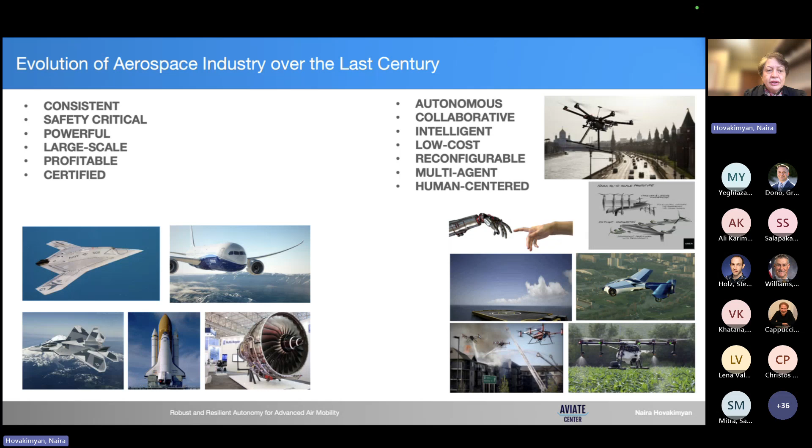I came to the United States back in 1998 to Georgia Tech to work on stability flight control systems. That's when I was first introduced to the aerospace industry. My PhD was in math, and the aerospace industry was presented through these major, powerful, certified technologies that the Georgia Tech group was working on. As I worked 28 years in this country, the industry faced change to more small-scale, collaborative, human-centered, intelligent solutions that you see on the right.

And this transformation of industry happened because the data explosion, enabled through CPUs and GPUs that became cheap and available, boosted the machine learning algorithms. We see today large language models, vision language action models that are transforming the way control systems are being designed and deployed. From the perspective of the aerospace industry, this transformation can be viewed as going from high altitude to low altitude.

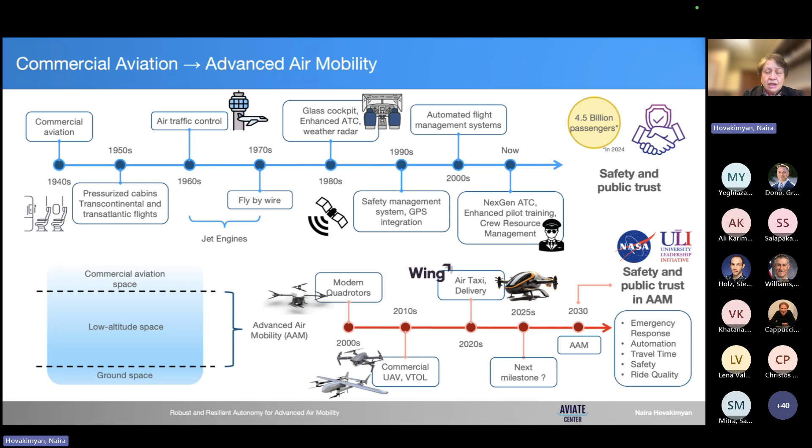By enforcing zero tolerance to accidents, over 100 years, commercial aviation has reached safety and public trust by flying 4.5 billion passengers per year. The same cannot be said for low-altitude space, which became actively deployed in this century. And the recent DCA airport collision of last January is evidence of the fact that the low-altitude space still remains largely vulnerable to different uncertainties and unpredictable circumstances.

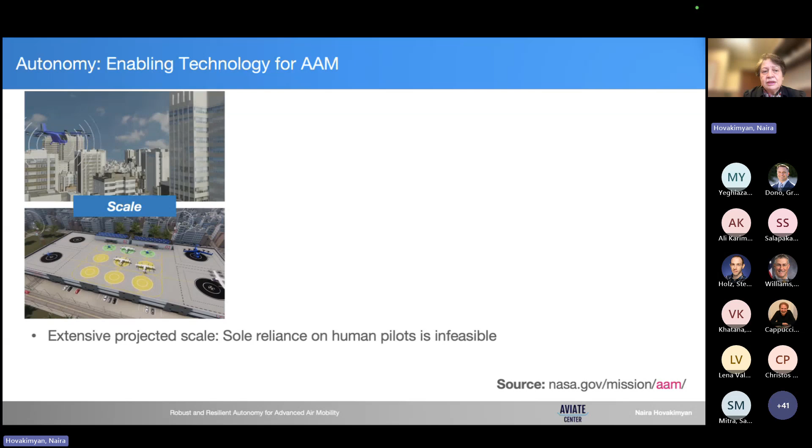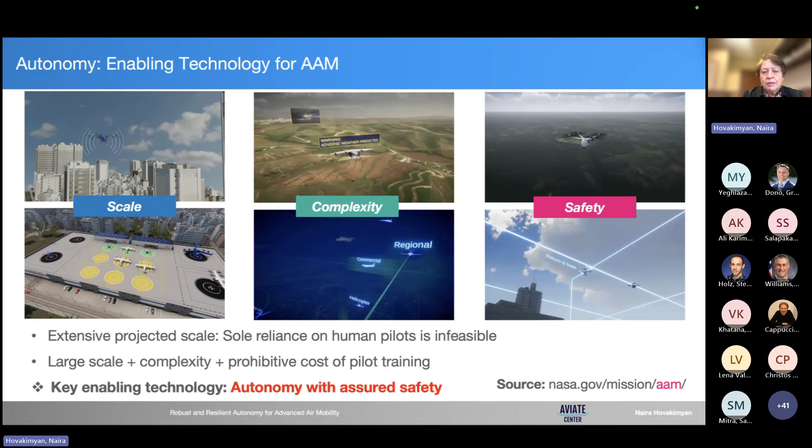This particular ULI project had as one of its objectives to design and deploy safety architectures for autonomous systems that would enable, for example, easy access for emergency response, for healthcare, where we're trying to look into travel time minimization, cargo delivery, and enabling all of this at scale and safely. So the key challenges that we see here in the low-altitude space are how to enable operations at scale, given the complexity of these operations, and to ensure that we can achieve it all with safety. That's why autonomy with assured safety may be identified as one of the thrusts within NASA ARMD.

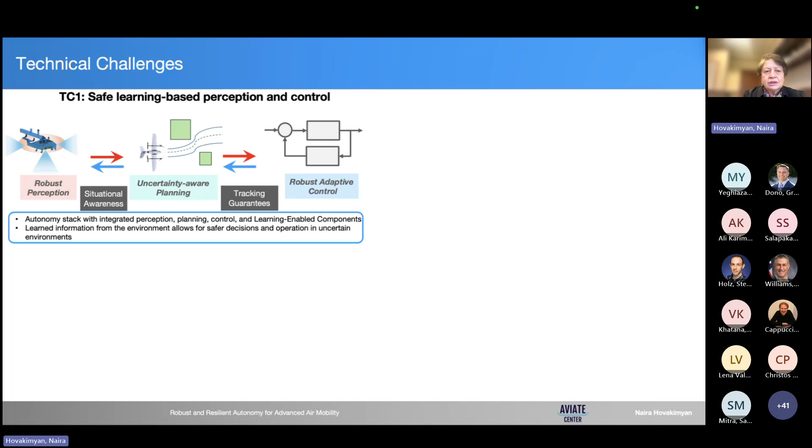The technical challenges that this particular ULI has tried to address include safe learning-based perception and control, fast data-driven and code-level verification, runtime fault diagnosis and reachability analysis, testing, evaluation, and integration towards technology transfer. We have technical challenge leads present in this 1-hour meeting, and each of them will go into the details of their developments. I will cover TC1 partially.

At the heart of this ULI project is L1 adaptive control with its 20 years of history. We started the first development in 2004-5, with the first papers appearing in 2006. During 2007-10, NASA Langley enabled us to fly it on the subscale commercial jet that you see here. We were the only controller cleared by the pilots for stall and post-stall flight regimes, enabling data collection at the departure edges of the flight envelope, updating those models.

Over the years, we saw increased interest from different industries for commercialization and technology transfer. They were deployed on the Evolution autopilots of Raymarine, hydraulic pumps of Caterpillar.

These are other industries outside aerospace. We had tests on experimental rigs of Statoil and many other developments. Starting 2015, we got the opportunity to flight test it on Learjet and Vista platforms at Edwards Air Force Base. Various challenging scenarios were considered there, such as saber dance, well known in the aerospace industry.

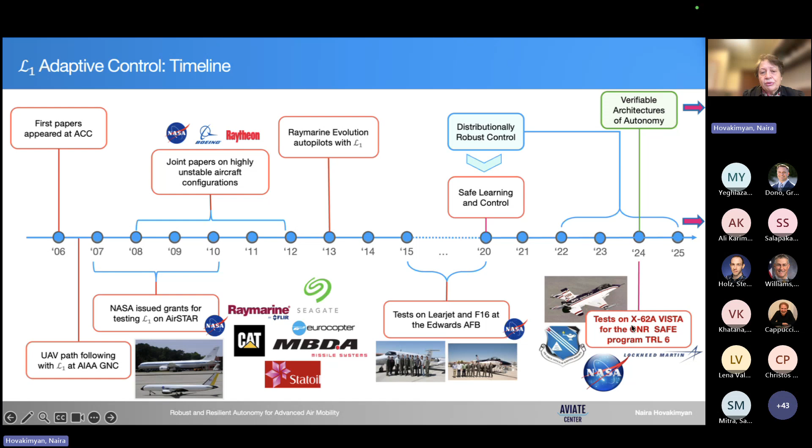And since 2020, we moved into safe learning and control, and we're looking into issues like distributionally robust control, which I will clarify through my talk. Last year, we already got Lockheed Martin putting it on the Vista platform and achieving TRL-6 in a 3G maneuver. As I go ahead, I will clarify now the particulars of the Lockheed Martin flight test. They couldn't join our talk today.

Lockheed Martin was also funded by ONR through their SAFE program, and they had the opportunity to augment the L1 adaptive controller on top of baseline nonlinear dynamic inversion. And with the failed right flap, like a heat-to-guns maneuver, you can see here the performance achieved by L1. Here is a small movie that will show both L1 on and off. They call it safe architecture on and off.

The detailed slides of their technology transition can be found on our Aviate website under last year's Autonomy Fest, which happened at the University of Nevada, Reno. Some of those movies you will see, but let me turn on this 12-second movie where you will see left and right for comparison with the safe architecture on and off. You see how L1 handles it pretty well, while without L1, the baseline nonlinear dynamic inversion was not able to keep it in the loop.

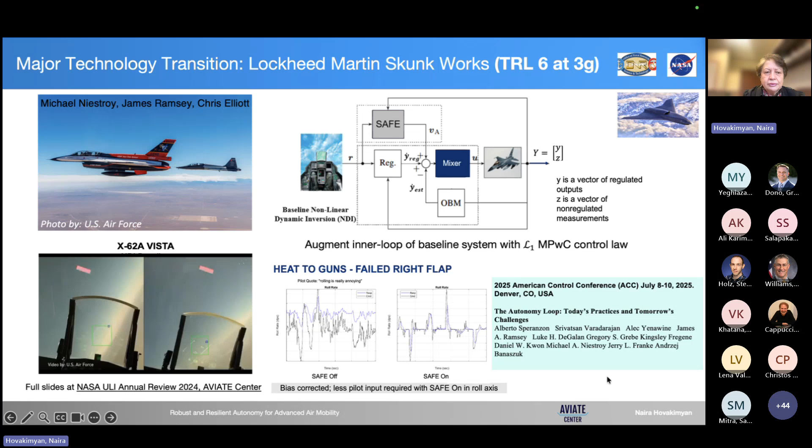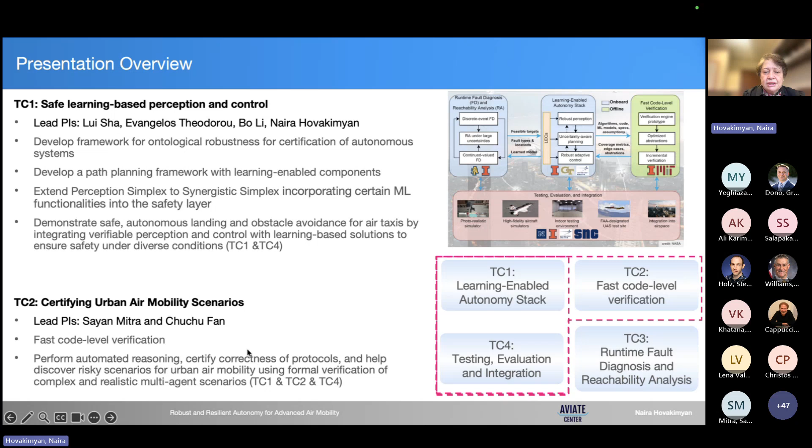I will start with TC1 and present safe learning-based perception and control. A PhD student of Lui Sha, Michael, will present the extension of perception simplex to synergistic simplex that incorporates machine learning functionalities into the safety layer. We will have Sayan Mitra covering fast code-level verification, and they will show their examples as an intersection between different TCs. We have Ali Karimoddini, who will cover TC3, the runtime fault diagnosis and reachability analysis, and they will show how they incorporate active learning and sensing for discrete faults, which will be an intersection between TC2 and TC3.

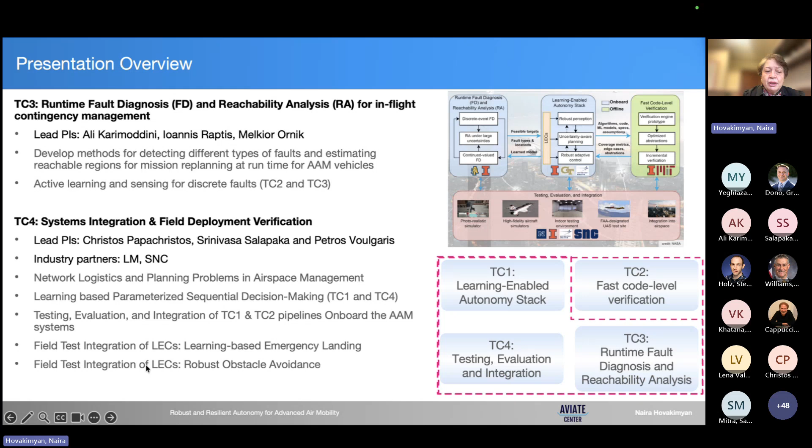TC4 is pretty extensive because we have here the flight test validation and industry technology transfers, and we'll have Vasu Salapaka covering network logistics and planning problems in airspace management, where he will present his learning-based parameterized sequential decision-making algorithms and how they scale with the help of AI-assisted tools. Christos Papachristos will show the flight test validations, videos that are very fun to watch.

Personally, I went out and reached high school and middle school girls in Urbana, and North Carolina had their outreach events. We were very well represented through the drone camp at UIUC and many other events. Now moving to the particular work done within our group.

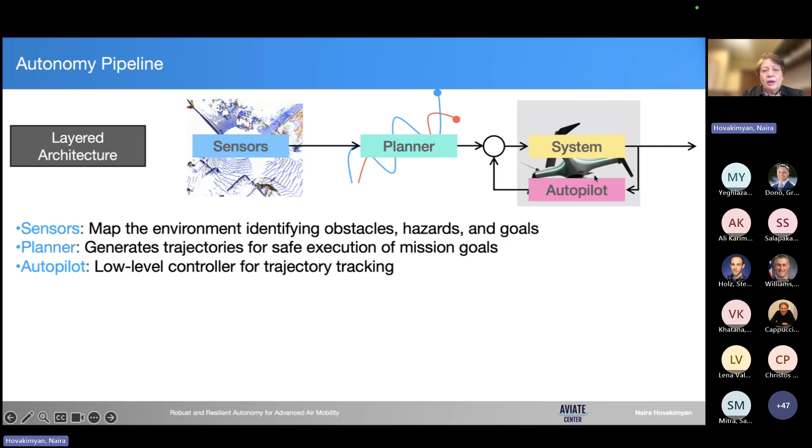I view this as one of the major challenges of autonomy because in this case, the situation changes. We have already vision-based sensors that map the environment. The planner, based on this map, updates the flight envelope instantaneously at every millisecond. And there is a low-level autopilot that has to follow the planner commands.

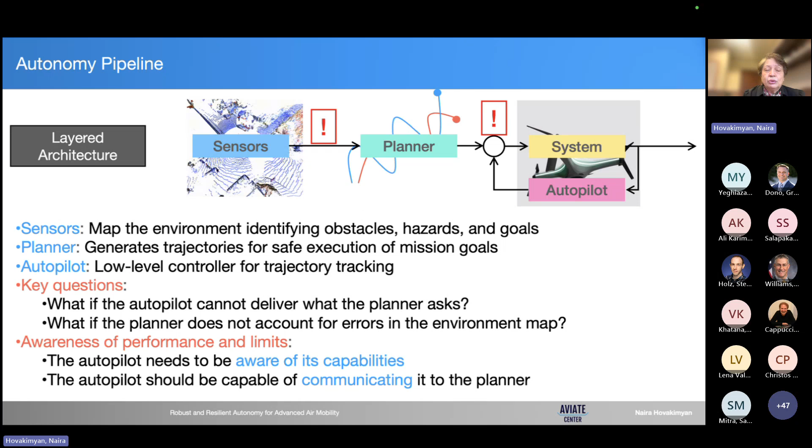So the challenge we see here is, what if the autopilot cannot deliver what the planner is asking for? What if the planner does not account for errors in the environmental map? So the autopilot needs to be aware of its capabilities and needs to communicate it to the planner so that they all are in sync. So here is the key challenge.

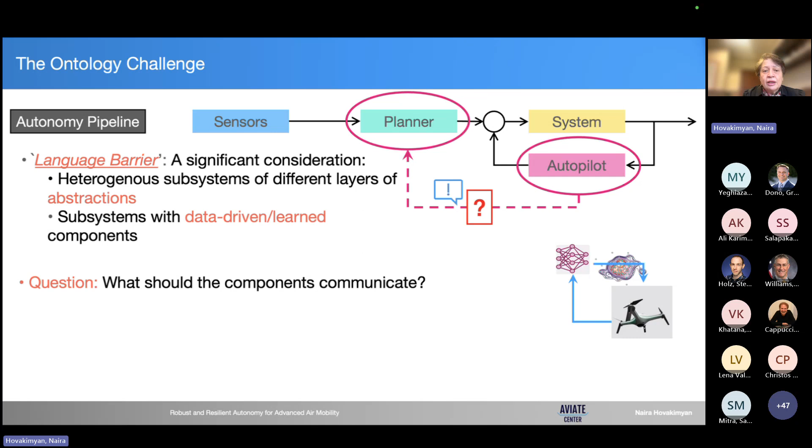The challenge is that when you have these vision-based sensors that are generating the map for the planner to produce the instantaneous path, this all happens with data-driven learned components, while our autopilot can be a PID that lives in the deterministic world with Nyquist and Bode defining its gain and phase margins.

So the challenge is what should the components communicate if they are born and developed in different worlds, stochastic and deterministic, and what should be the language of communication? These answers are critical for guaranteed robustness and assurance of learned data-driven systems.

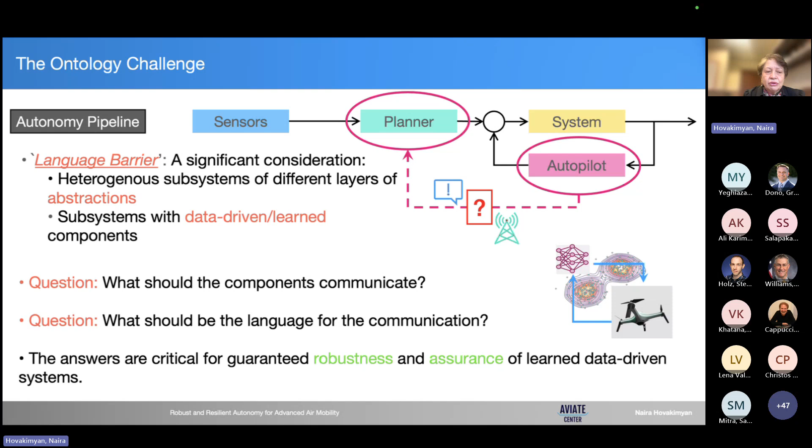So further challenges come with the fact that the guarantees coming from this stochastic world will be sensitive to distribution shifts. We need robustness to epistemic uncertainties, which are the learnable uncertainties, or as engineers would call them, known unknowns. We need robustness to aleatoric uncertainties, which are the unlearnable, the unknown unknowns. These are the disturbances and unpredictable environmental uncertainties. And we need also robustness to policy-induced uncertainties, which can be reducible.

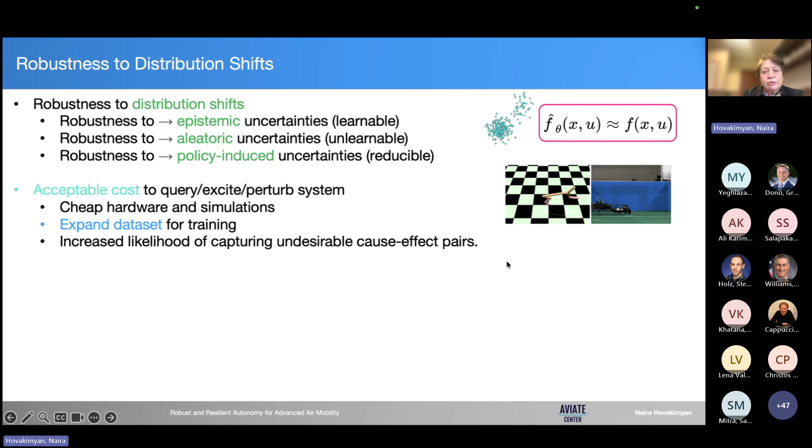It's one thing when you are dealing with cheap hardware or simulation environments where you can break, fall, get up, learn, collect the data, update the learning algorithm, update the network architecture, and iteratively improve infinitely, like many people do with reinforcement learning, to get an acceptable performance level.

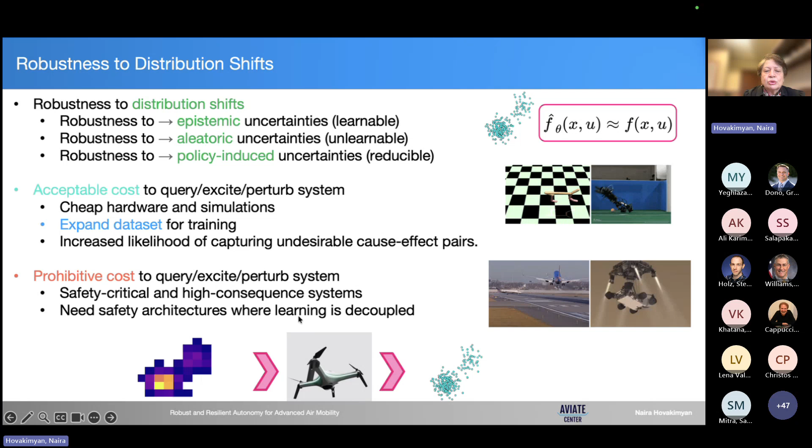It's another thing when you're dealing with safety-critical systems like an airplane or a mission landing on Mars, where the cost is absolutely prohibitive to fly, test, crash a million times, collect data, update, re-update, and fly. You just can't kill people infinite times. We need safety architectures where learning is decoupled from the performance. So the autonomy pipeline, as we said, involves the sensors, planner, and autopilot.

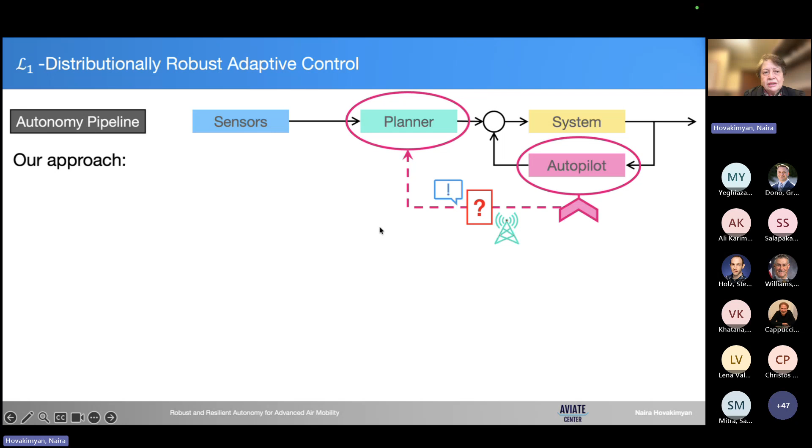The way we have addressed it is the distributionally robust L1 adaptive control. What does it do? We derived distributional robustness guarantees for the deterministic L1 adaptive controller that was flown on Learjet and on the subscale Boeing airplane at NASA and had its guaranteed gain and phase margins. These airplanes have flown with an L1 adaptive controller that had its guaranteed gain and time delay margins.

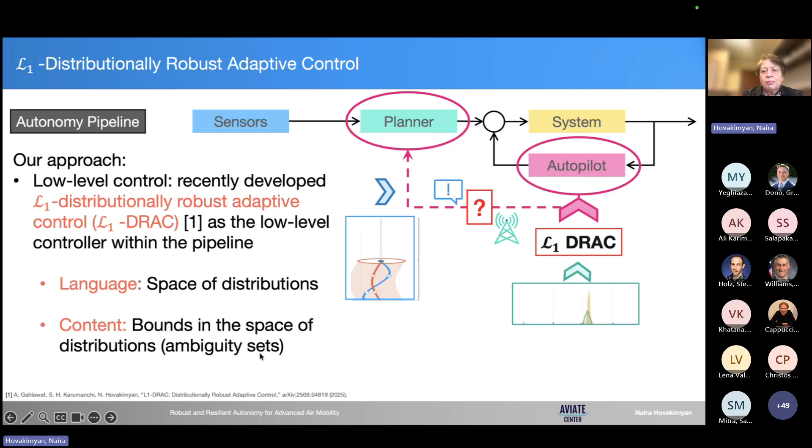Now this L1 is deployed on a system that's operating autonomously, where there are vision-based sensors producing the instantaneous updates for the planner. How will L1 work and communicate with this type of new inputs to the system? So we define distributional robustness guarantees for L1. The language is the space of distributions, and we bound the performance of the L1 adaptive controller in the space of distributions in terms of ambiguity sets. These bounds are derived in terms of Wasserstein ambiguity sets.

Let's look at what the stochastic planner is doing. The stochastic planner solves a minimization problem over the expectation over an ambiguity set. This ambiguity set is now obtained through the distributional robustness bounds of the L1 adaptive controller.

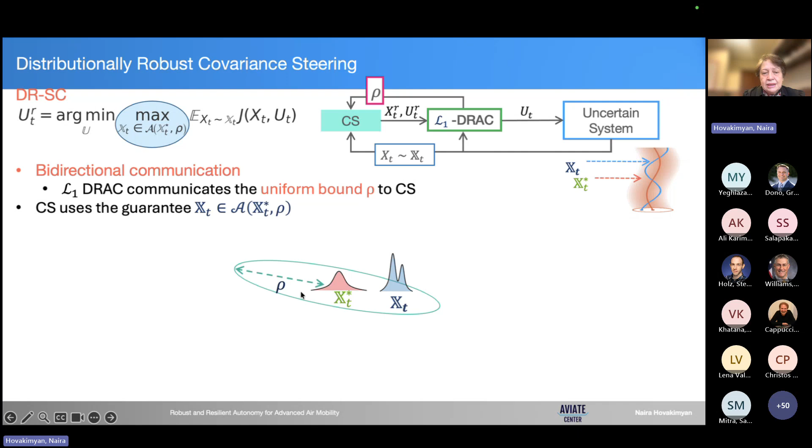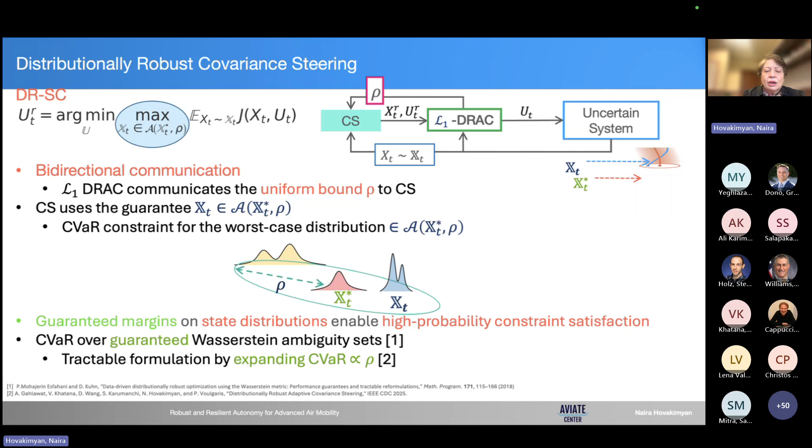As an exercise, we have done it for covariance steering, which is a stochastic planner. Covariance steering now uses the ambiguity set coming from the L1 adaptive controller with a conditional value at risk constraint for the worst-case distribution belonging to that ambiguity set. We get guaranteed margins on state distributions that enable high-probability constraint satisfaction, guaranteed over Wasserstein ambiguity sets. There is a tractable formulation by expanding conditional value at risk proportional to the radius of this ambiguity set.

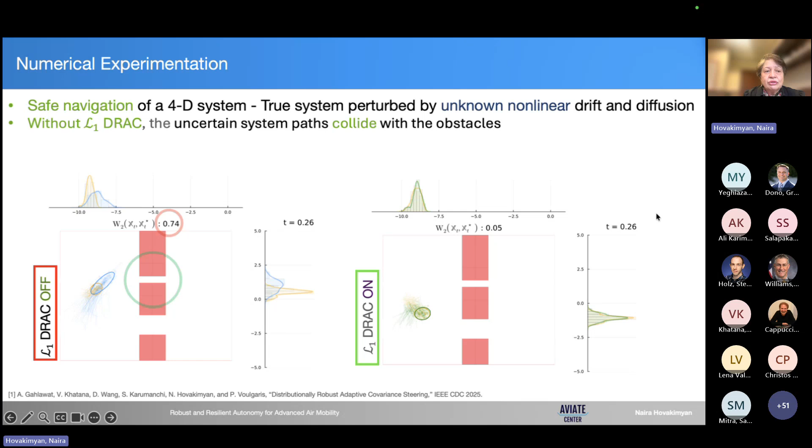Here is a safe navigation of a four-dimensional system, a true system perturbed by unknown nonlinear drift and diffusion. Without L1 DRAC, you see the performance on the left where it starts crashing into the obstacles. And with L1, we can use the safety margin propagated by L1 to find the safe navigation path.

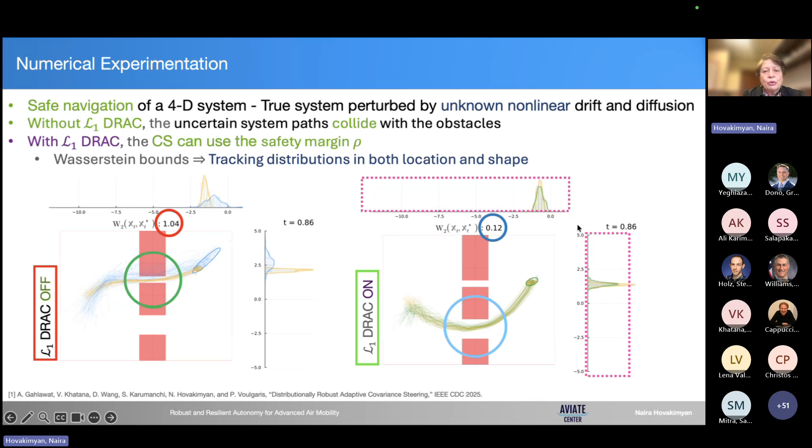The Wasserstein bounds help us track distributions in both location and shape. What you see here are the projections of these distributions, and you see that the green eventually tracks the yellow, where the yellow is the nominal and the green is the uncertain. We have also extended it to imitation learning. What do we mean by that? Say, the pilots get trained at first on simulators, and then they go onto the real airplane.

And sometimes the pilots, I have heard talking, said that the simulator was so good that the transition to the real airplane was almost seamless. Nevertheless, there is a difference between the real world and the simulator. And this is where the L1 adaptive controller can help to compensate for the uncertainties.

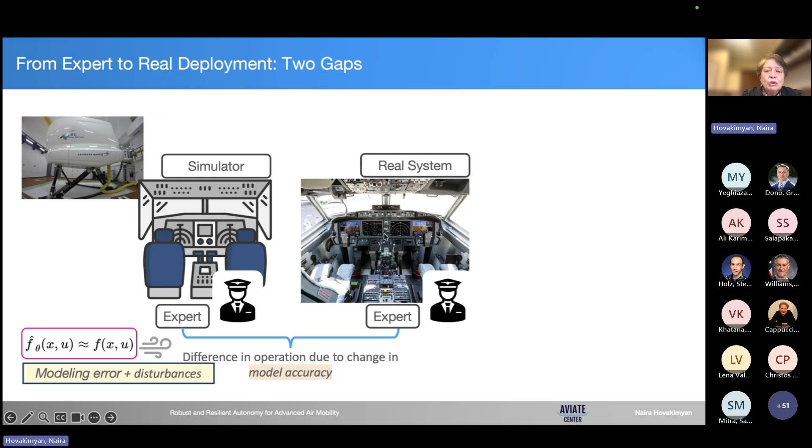But now as we move into the autonomy world, and we have the pilot replaced by the autonomous agent, AI agent, we don't want to say, let L1 go and take care of everything. That would be artificially overselling L1. Here, what we see as a potential solution is that you collect pilot's data, you build an imitation learning policy, and you use the imitation learning policy for the AI agent.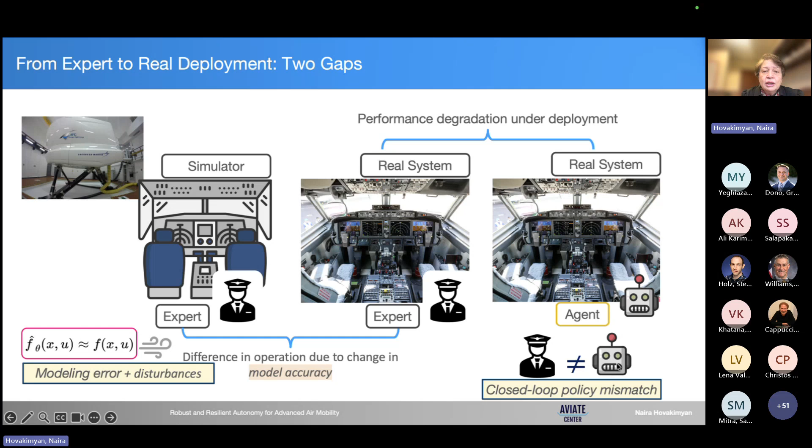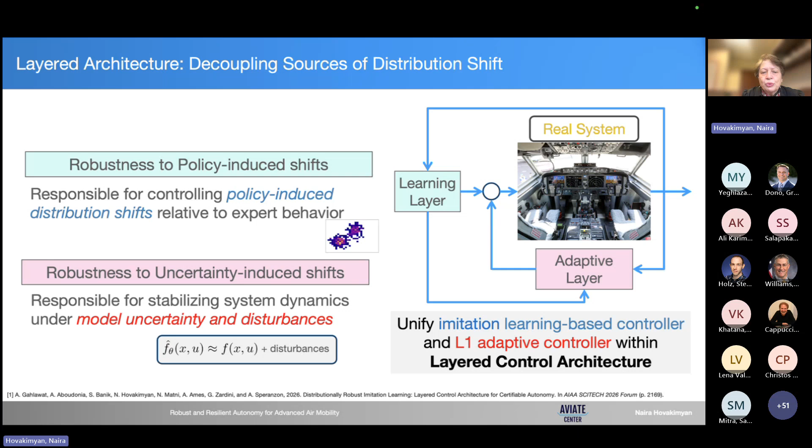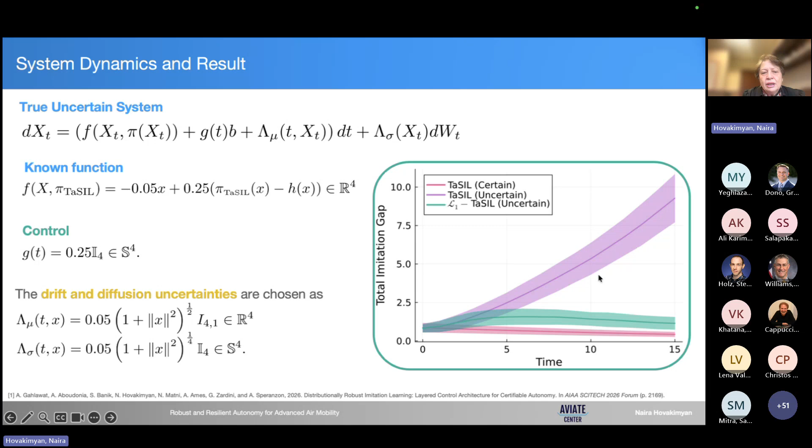Now we have two different sources of uncertainty, the model change and the policy change. And within a layered architecture, we can kind of compensate for both with decoupled, guaranteed, provable performance bounds. Here is an example application of that where we show how L1 reduces the imitation learning gap, as you see here. And now we are in the process of testing it on this GUAM model provided to us by NASA Langley. Hopefully we will have these results summarized for our May review.

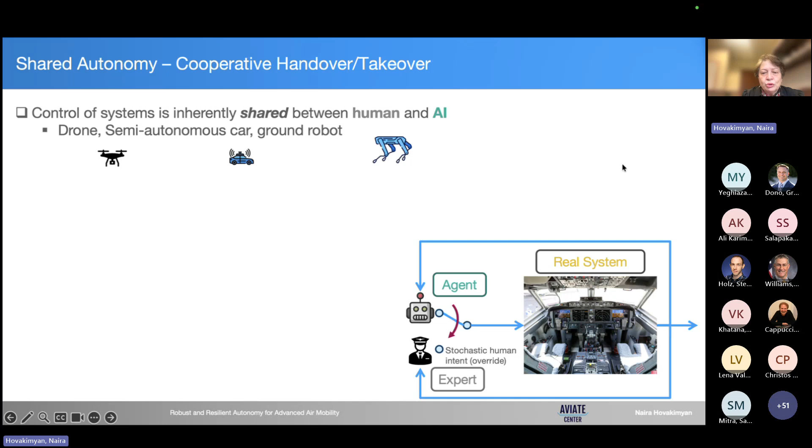The next problem that comes our way, which will most likely be solved outside this ULI, is the problem of shared autonomy. What if, for example, the pilot needs to take over the autonomous agent, or the autonomous agent has to take over the pilot? So this is called a problem of shared autonomy, where a game theoretic formulation was ideal to help us come up with an optimal switch. However, this already goes, as I said, beyond the scope of this ULI. It's like future work, and we are working on it.

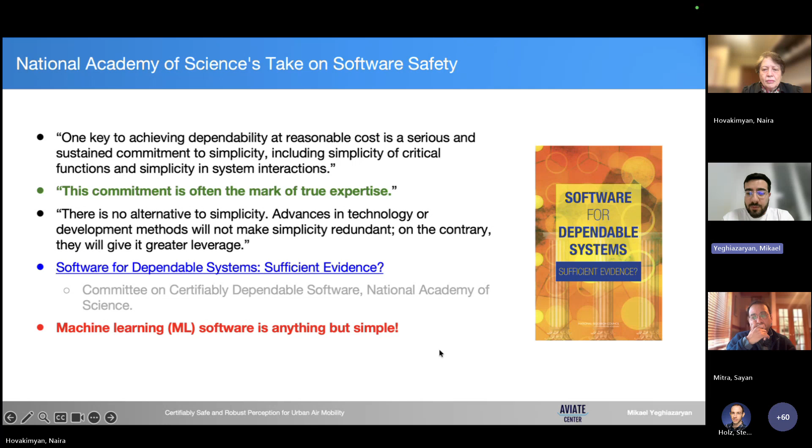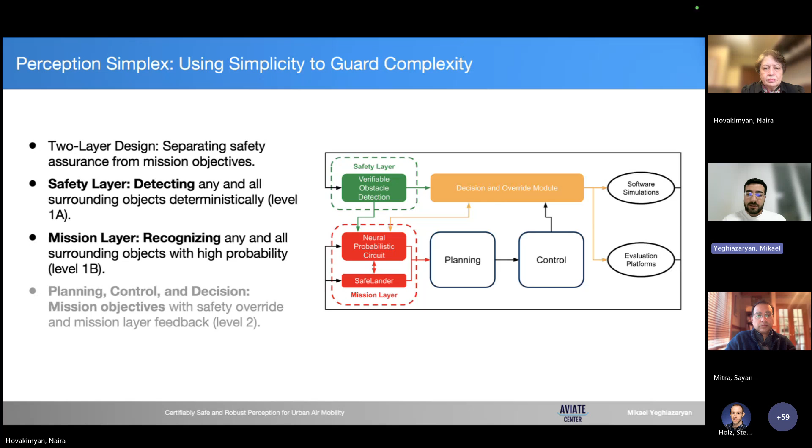That's why Perception Simplex was developed, which guarantees collision avoidance under obstacle detection faults only. It acts as a safety layer monitoring and overriding ML actions. It addresses a critical failure mode of obstacle detection failure, because missed obstacles cause many accidents. And verifiable obstacle detection is the key algorithm that enables Perception Simplex's guarantees.

Well, this is great, but Perception Simplex can be overly conservative sometimes, especially at high speeds, which limits the performance. The safest vehicle is a stationary vehicle, but it's not very useful. That's why Synergistic Simplex was developed, which extends Perception Simplex by incorporating carefully selected machine learning functionality into the safety layer. It improves performance without losing any original safety guarantees. And I repeat, we do improve performance and we do not lose a single bit of original safety guarantees. In this way, we get the best of both worlds.

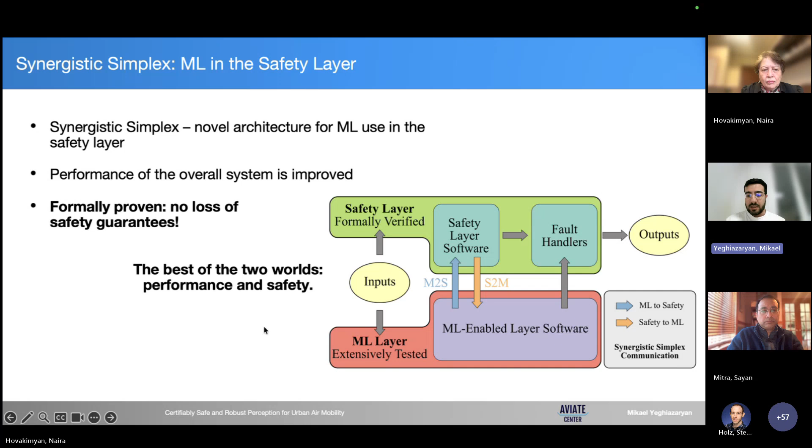We validated Synergistic Simplex in software-in-the-loop simulations on autonomous ground vehicles, and the results confirmed improved performance with full safety retention. And Synergistic Simplex as an architecture is likely a strong candidate for future high-performing and verifiably safe systems.

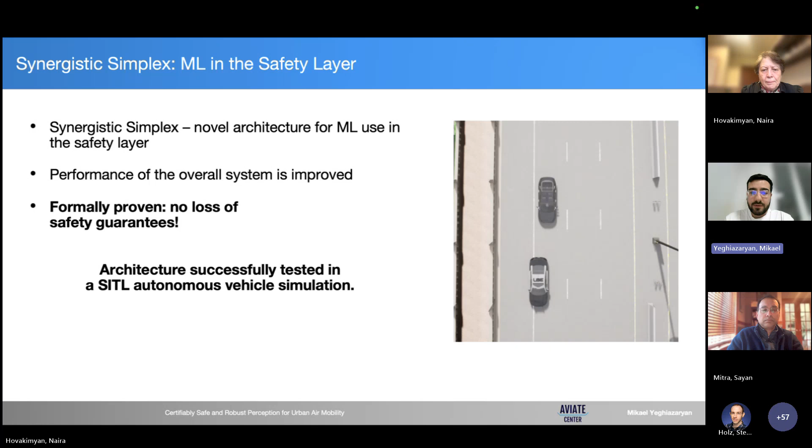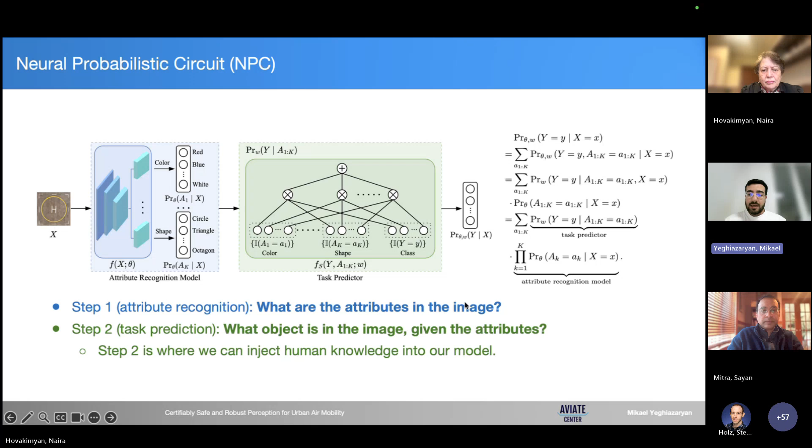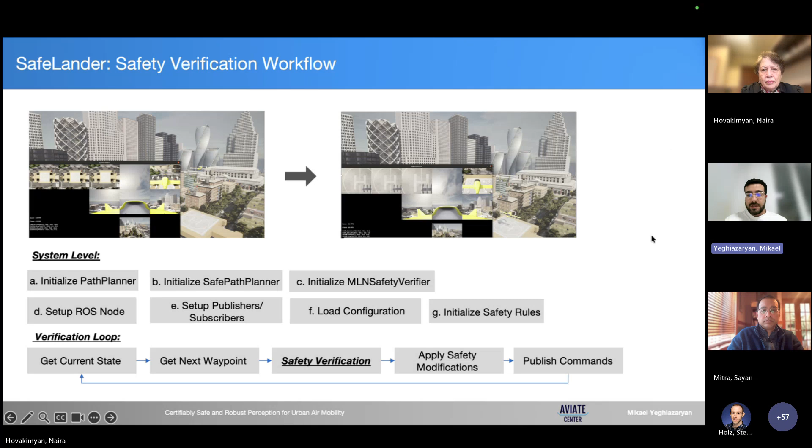Another direction of research was SafeLander, led by Professor Bo Li, and it ensures vehicles follow predefined rules using state-of-the-art models in AI and ML. And it prevents illegal behavior that could compromise system safety.

Now, for fast and safe testing of safety-related algorithms, we also developed Air Taxi Sim, a simulator for autonomous aerial vehicles in urban environments based on CARLA. It supports vehicles like GUAM and Minihawk, which is the result of collaborations with other ULI teams, such as from the University of Nevada, Reno, MIT, and others. And it provides high-fidelity perception and physics simulation across multiple sensor modalities.

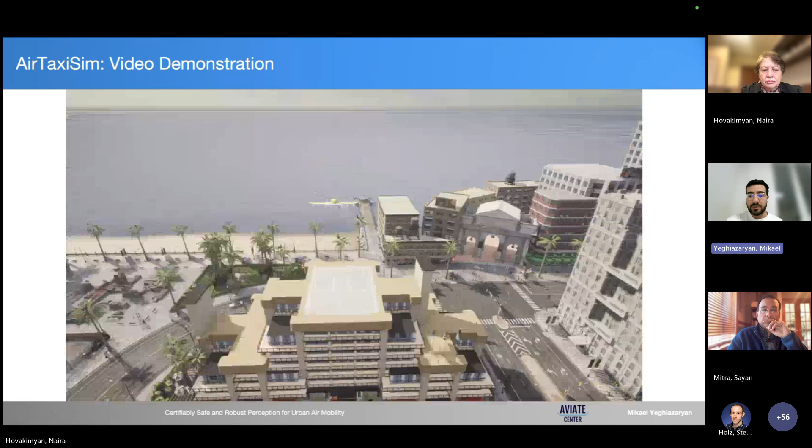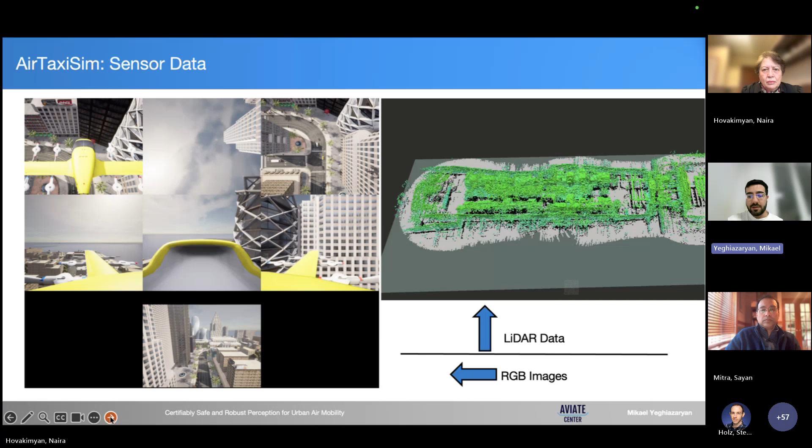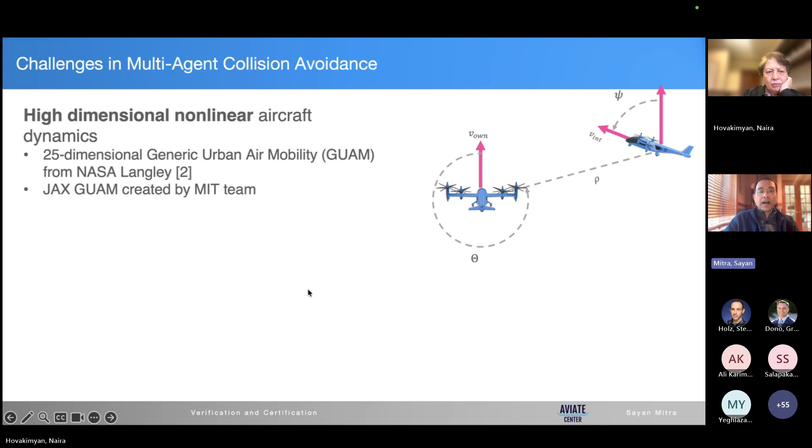Automated reasoning over multi-agent scenarios across nonlinear dynamics, AI decision models to certify correctness and discover risky scenarios before they happen. So let me tell you about the technical challenge as is sketched in this slide. Consider two agents in airspace, each with its own sensor system and its own AI-driven module. Agent I receives sensor readings about Agent J, processes them on board through a neural network.

In our case, it's the ACAS Xu network, the airborne collision avoidance system. And based on that processing, it issues advisories to climb up, to steer left or right. The dynamics we are working with comes from NASA Langley's generic urban air mobility model that you heard about earlier. This is a high fidelity reference vehicle model.

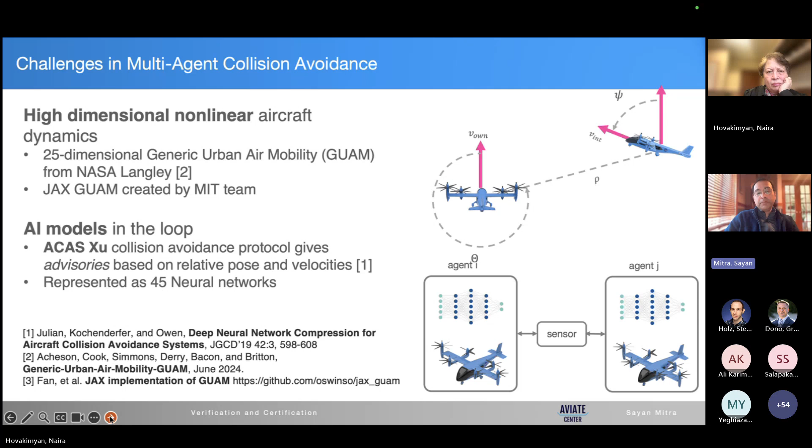So we have nonlinear flight dynamics on top of a compressed deep neural network, making real-time decisions. And we need to reason about this whole pipeline together, not just the individual pieces. This is a difficult computational problem and one that existing tools have not been able to handle at scale. So let me introduce the VERSE tool that we have developed in this project.

VERSE is a Python library we have built specifically for modeling and verification of multi-agent scenarios without requiring the users to be verification experts. The core idea driving VERSE is reachability analysis. So instead of asking what happens in this one particular run or test, we ask what are all the possible states that the system could reach given uncertainty in the initial conditions.

VERSE propagates that uncertain set forward through the dynamics of the system, through the sensor models and the neural network decision modules. And it uses previous research on sensitivity analysis, tree-based search, and reachability. And recently, we have also integrated it with the CROWN tool for neural network certification. So this lets us make formal statements like under these initial conditions, the aircraft will not lose the required separation. Or conversely, it helps us discover initial conditions that lead to near misses.

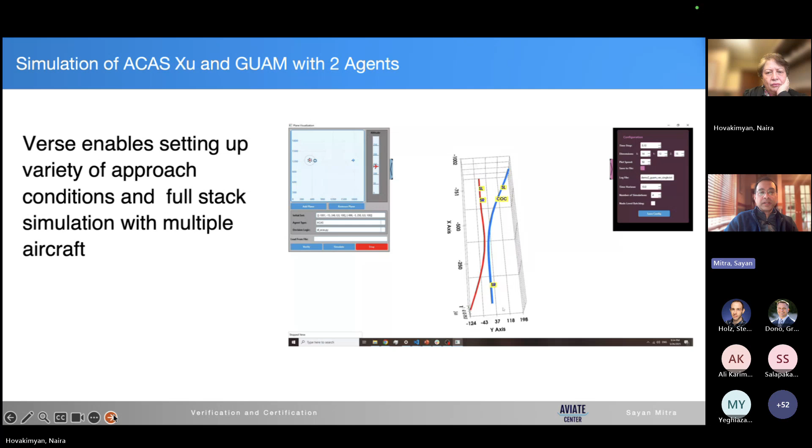So in this slide, you're seeing a demonstration of the full stack capability of VERSE. We have integrated VERSE with this ACAS Xu neural network, as well as the GUAM aircraft dynamics. And you're seeing simulation of two airplanes approaching each other and then avoiding collision in this shared airspace. The next slide shows a full stack run with 4 aircraft executing ACAS Xu neural network, receiving sensor inputs. We can move on to the next slide.

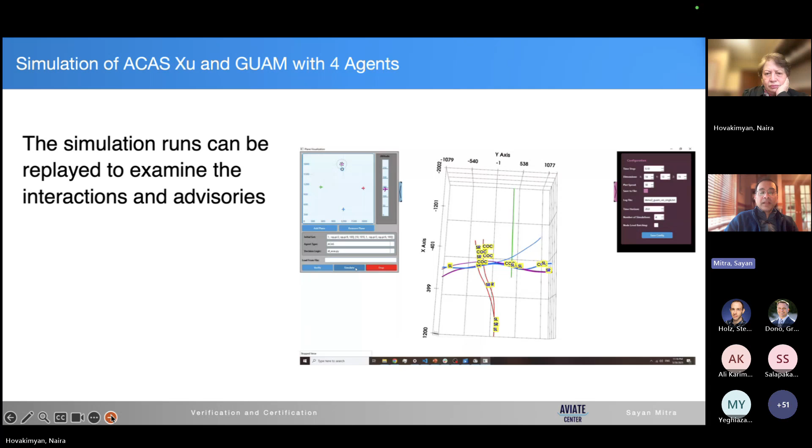Yeah, thank you. Issuing advisories in real time, and the behavior matches civil aviation conventions. And every run can be replayed and examined so engineers can trace exactly why a particular advisory was issued and where an agent interaction occurred. The next slide shows the real capability that VERSE brings to the table. This allows formal verification.

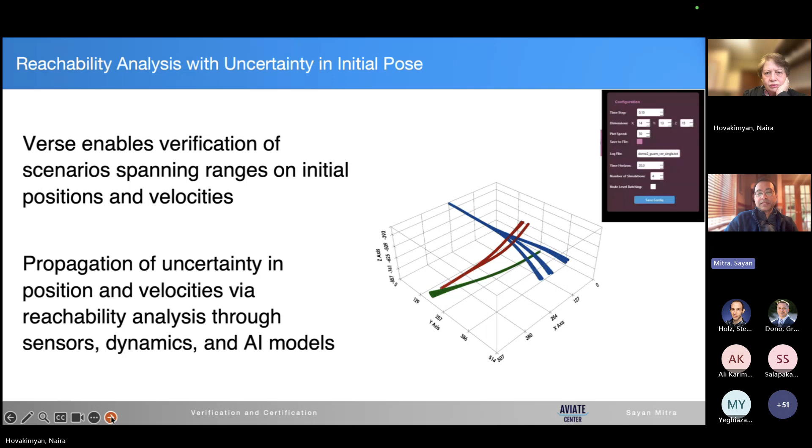Here you can see reachability analysis over ranges of initial positions and velocities, not just a single starting condition. This is where uncertainty in the initial conditions is simultaneously propagated through the sensors, the GUAM dynamics, as well as the onboard AI models. This is the key capability that moves us from a few tests to certification.

Okay, in the final slide, I'm going to summarize the overall thrust. While we focused on the VERSE tool in today's presentation, which allows us to do verification of urban air mobility protocols via reachability analysis, we have pushed forward several other research directions in this thrust that I did not have a chance to talk about in detail.

I'll mention the second RADIUM framework developed by Professor Chuchu Fan and her group at MIT. This is a method for simultaneous prediction and repair of policies, with hardware experiments showing repaired policies that are up to 5 times more robust than their nominal counterparts.

A third method has also been developed at MIT to discover failures arising from sim-to-real gaps, alluded to earlier by Professor Hovakimyan under limitations of hardware budget. For example, this method shows up to 89 to 100% accuracy in prediction of hardware failures compared to much smaller numbers based on simulations alone.

So together, these tools form a rigorous and scalable path to certifying autonomous aircraft, from code-level verification all the way to real-world robustness. Thank you very much, and I will hand off to Professor Ali Karimoddini next.

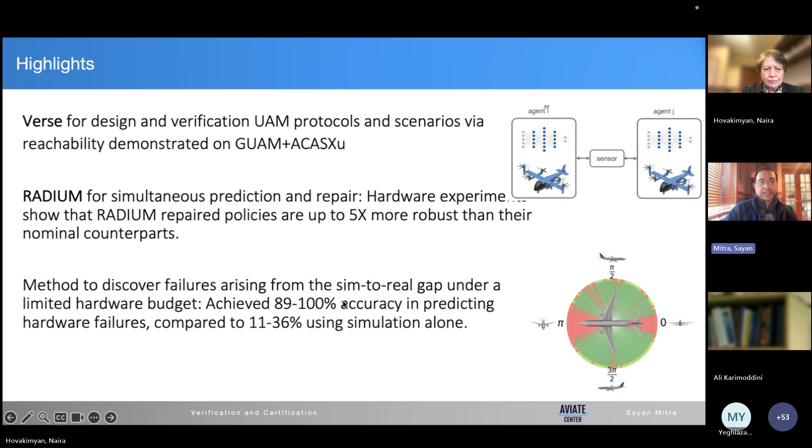Okay, good afternoon. Thank you again. My name is Ali Karimoddini, with colleagues Dr. Raptis and Dr. Ornik. We covered the fault diagnosis and reachability analysis. If we can go to the next slide.

No matter what good practices we use to design engineering systems, faults cannot be prevented and may happen anytime, anywhere in the system. At that time, it is very critical to quickly identify what is the source of the fault, where it is, and how we can handle it.

One example, flight 191, 1979: a fault happened, the crew had 15 seconds to recover, but due to the short period of time, they were not able to do the root cause analysis and identify the source of the fault. That was one of the factors, across multiple factors, that contributed to that unfortunate accident.

So, motivated by this example, this technical challenge is focusing on how we can identify faults and then come up with a recovery plan in the form of reachability analysis, in a pretty short period of time, in real time, so to speak. So there are different ways that we have been trying to identify the source of fault, in a discrete domain and continuous domain.

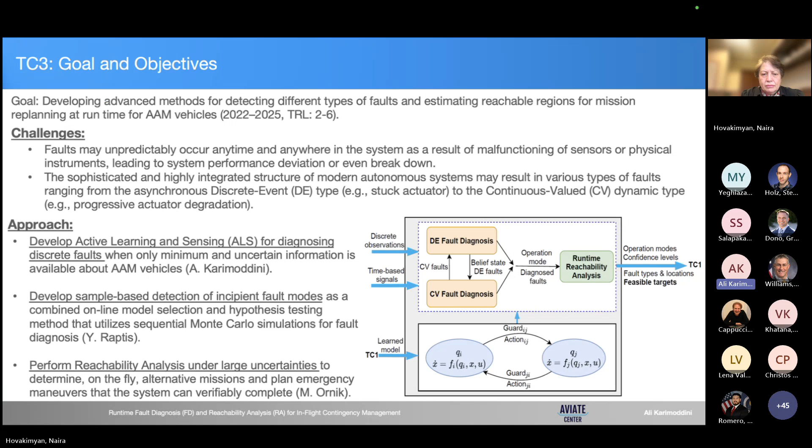Here is the discrete event approach for detecting faults. Some of the activities in the system are discrete by nature, for example on or off. And some of the faults are supposed to be detected from the continuous signals of the system, whether it's a trend or a change of trend in the continuous signals.

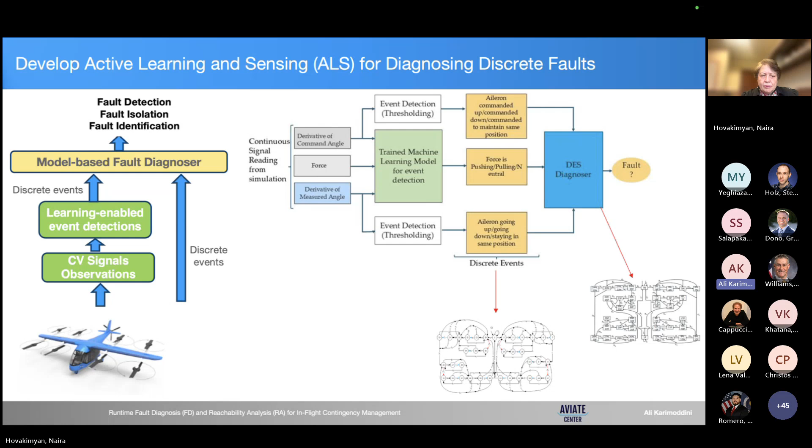Here you see we have modeled the aileron system and combined it with the GUAM simulator. The diagnoser is running in real time. We inject a fault around 8 seconds, in the form of a power failure in one of the actuators. After a few seconds, the system is able to detect the fault. That's what the diagnoser I'm referring to is doing.

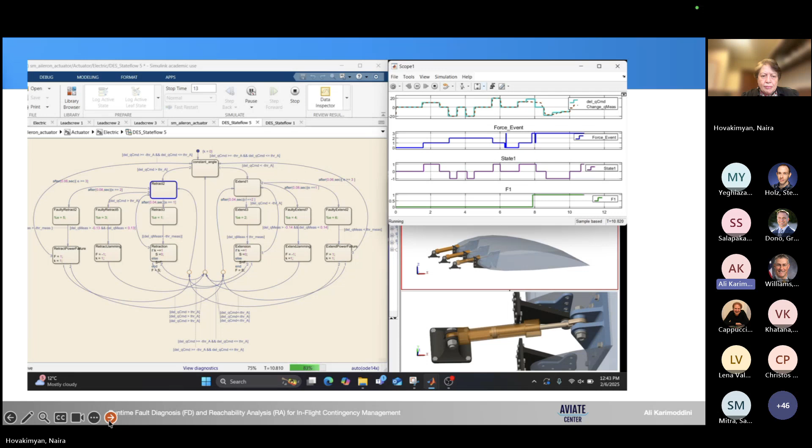Complementing this method, my colleague Dr. Raptis and his team have been working on diagnosing faults based on sequential Bayesian filtering. They use sampling-based particle filtering with the analytical model, and also added data-driven models to make it more applicable to practical systems where the analytical model may not always be available. Combining the analytical model plus data-driven techniques, they identify the probability of fault occurrence, and once the probability reaches a certain level, a fault identification is triggered and the system is notified.

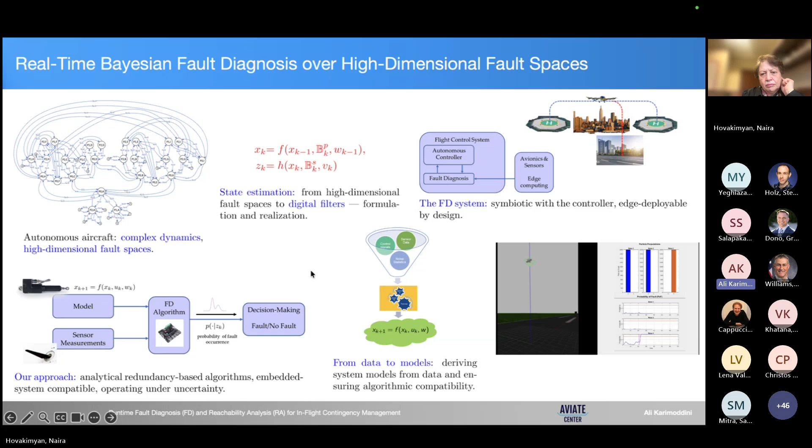What you see on the video on the right side is an aircraft, a mini-hawk platform, trying to ascend to a certain altitude. A fault is injected in the form of loss of thrust in one of the rotors. After a couple of seconds, the probability reaches a certain level that we can detect the fault. This is a particularly difficult task, especially since the onboard controller is trying to recover. So there is a fault, the system is trying to recover, yet our fault diagnoser is able to detect and identify the fault.

Going to the next slide. Now, having the faults, whether from the continuous method that Yanis Raptis and my group use to understand the physical model of the system as well as the uncertainties involved, Dr. Melkior Ornik and his team are trying to identify the safest reachable set that we can guarantee we can reach. Because of that, it is pretty conservative, since we want a guaranteed reachable set. And that's very difficult if we want to do it over the manifold, over the entire flight envelope.

So to make it feasible, the method we have been following is to identify and come up with an adaptive hybridization method over a short horizon that can be computed in real time, so that we can identify the reachable set in real time. That's pretty much about this thrust, and passing it to the next speaker.

Hello, I'll be talking about the framework we're designing for problems that come in the context of network design, planning, and logistic problems in airspace and air traffic management. The main challenge comes from the fact that these problems are combinatorial in nature. Problems like routing, resource allocation, scheduling, congestion avoidance have this combinatorial aspect, in the sense that the decision space increases exponentially with the number of, for example, facilities that you may be trying to design.

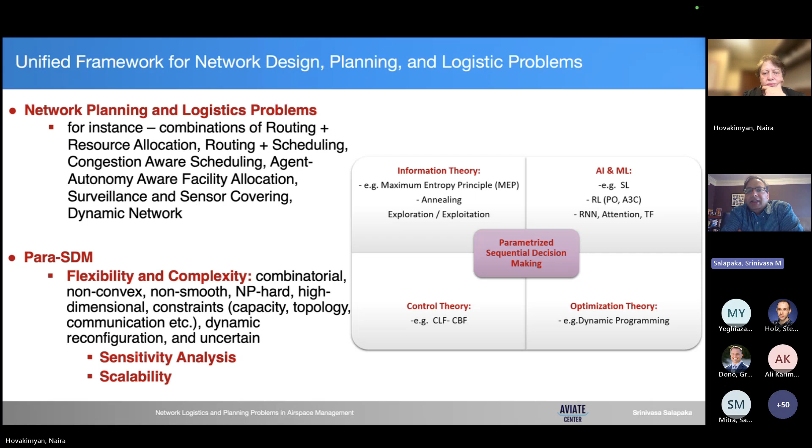Over the last year, we have taken this algorithmic framework and used AI and ML tools to make this algorithm scalable. We used these tools particularly to emphasize the scalability aspect, as well as to learn from the environment, like the uncertainties aspect, while keeping the good points we had before, that is addressing the combinatorial aspects and coming up with coupled equations. So we are retaining the good aspects and improving on scalability and handling uncertainty. For example, here we are showing one component we had from before in the earlier para-SDM framework, where one part of the algorithm would become computationally explosive with the number of facilities.

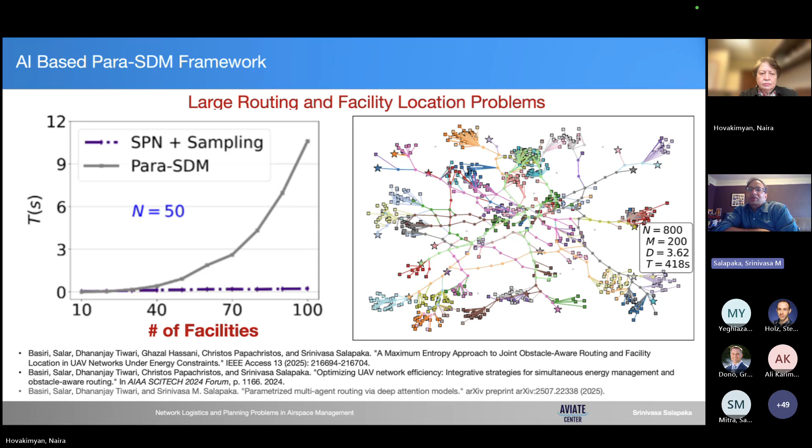This kind of improvement has helped us solve pretty complicated problems, such as a network design problem where squares represent entry points into a network, say by different UAVs, and stars represent destinations. We need to find the best routes from each square to its corresponding destination star, while also simultaneously designing the facilities along the way. This is a difficult problem, and with these improvements we can solve it scalably, while our original algorithm could already get pretty good solutions.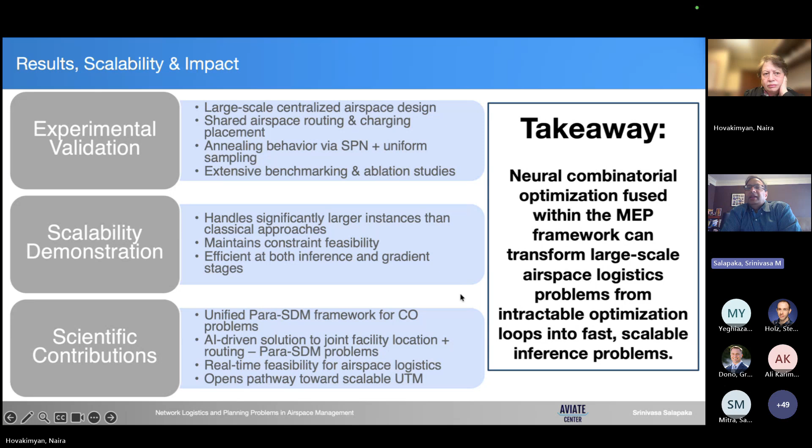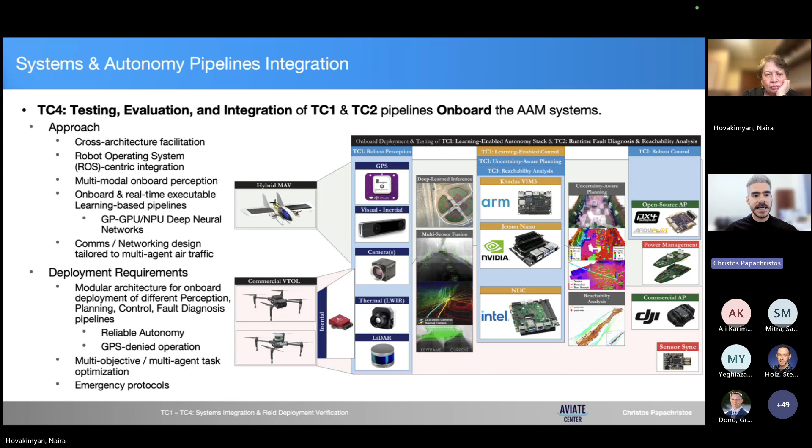One such case is the Gannet amphibious UAS prototype we developed over the duration of our project, capable of being deployed in water-based environments and surviving multiple water surface takeoffs and landings, or even staying immersed for prolonged periods. This novel platform also has integrated solar-based recharging capabilities so it can act as a perpetually deployed wide area monitoring system, self-recharging in the wild without needing special infrastructure, while self-hibernating over prolonged periods until a critical local event occurs, and the vehicle can then sense it, wake up, and rapidly respond by executing a local mission.

The vehicle is a VTOL and fixed-wing hybrid, equipped with a suite of sensors and high-level compute solutions allowing the execution of various navigation routines autonomously.

We name this concept the new generation of in-the-wild, perpetually deployed aerial robotics. A critical capability related to this system is that we can accomplish repeat, back-to-back testing of autonomous emergency event handling while flying across real-world natural environments with unstructured terrain regions, specifically handling emergency landing while executing non-high altitude flight, much like an urban air mobility platform would.

The safe and repeatable testing characteristic comes from the fact that we can even allow the vehicle to choose to land on water, since its amphibious, watertight design allows it to survive even staying immersed for a long time.

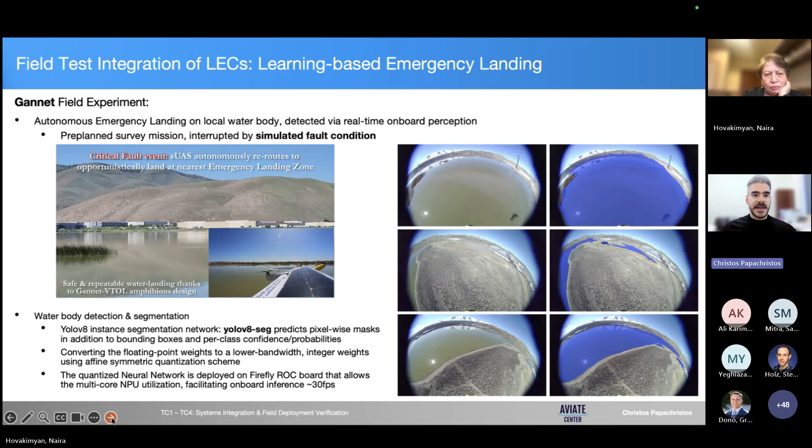Next slide, please. The cross-architectural approach allowed us to also integrate these capabilities with systems of our industry partner here, Sierra Nevada Corporation, that had recently acquired Volansi, which is a mid-scale hybrid envelope UAS manufacturer, allowing real-world field testing with more powerful payloads and computational capabilities that are closer to what an urban air mobility platform can support. More specifically, the Voly-10 platform that can carry up to 10 pounds of payloads over 50 miles of range, and which was equipped with a multi-camera payload and a powerful NVIDIA Ampere GPU, was also systematically field tested with similar learning-enabled components. Next slide.

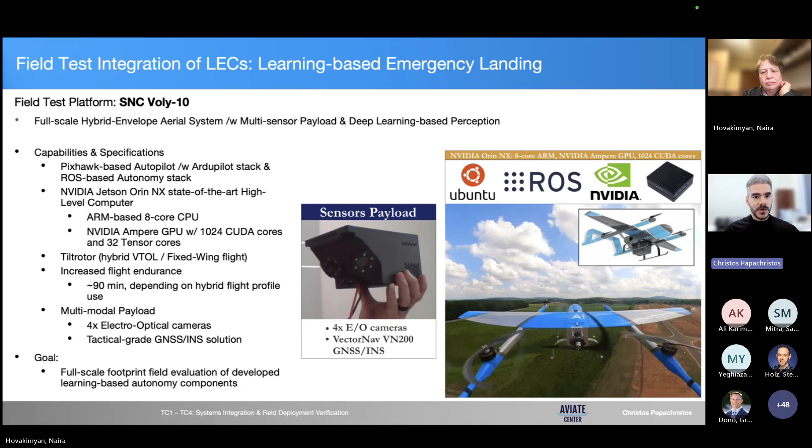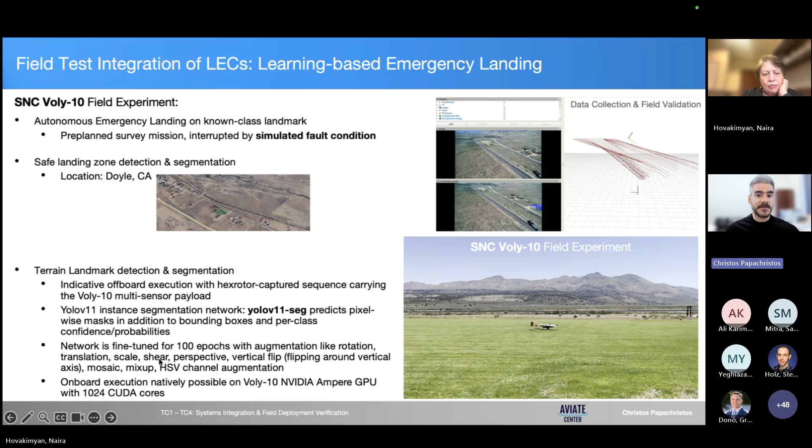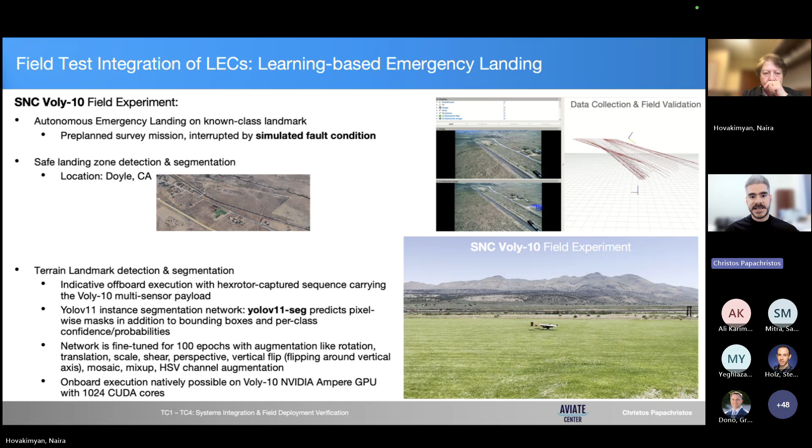The goal was to draw experience and data from transitioning to our industry partner capabilities, such as autonomous emergency landing handling at local terrain landmarks that can be identified using visual appearance alone and classified with respect to their admissibility for acting as safe landing zones, offering robustness against possible failure of multiple subsystems, including GPS, due to either fault detecting malfunctions or even to forms of electronic warfare, such as GPS spoofing. Deploying on more powerful GPU architectures comes with the added benefit of increased detection, prediction, and segmentation accuracy of learning-enabled components by avoiding the need for quantization techniques, while also allowing the multi-camera streams to be processed concurrently and smoothly.

Next slide, please. Finally, the last field validation testing platform to mention is the Minihawk, which is unique because it is a rapidly prototyped tilt-rotor hybrid, which can be easily reproduced due to its fully 3D printed design, while at the same time it can carry state-of-the-art perception compute modules, including a stereo visual inertial odometry device, a separate USB camera with high focal length optics, as well as traditional autopilot hardware, but also a small-scale compute solution, similar to the one of the amphibious Gannet shown in the beginning, allowing it to use up to 5 TOPS of onboard neural processing unit compute to facilitate the real-time onboard deployment of learning-enabled component capabilities.

Yes. I thought somebody wanted to say something.

All right. Its rapidly prototyped nature allows both its fast reproduction and possible repair, but also allowed us to share this design with other ULI partners, as previously mentioned. And now UIUC has their own Minihawk to facilitate local real-world testing of autonomy pipelines during early development, with the added benefits of cross-institution, cross-partner adoption of the same system.

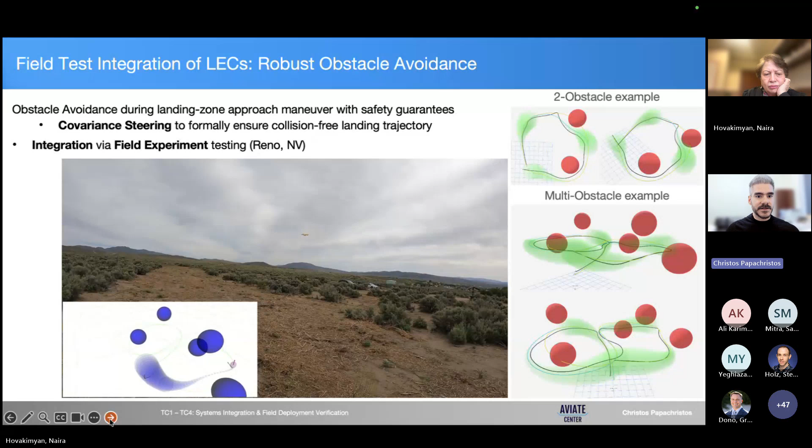Next slide, please. This smaller scale system was ideally positioned to conduct systematic field testing of the trajectory planning framework of covariance steering that grants obstacle collision avoidance with guarantees through sequences of tests conducted at low altitude, but over areas spanning much wider dimensions than any lab indoor location would have. At the stage of field validation accomplished during our project, such tests included multiple covariance steering-based replanning iterations as simulated obstacles are virtually discovered during a pre-planned inbound landing approach maneuver, resulting in the execution of replanned flight trajectories computed to avoid these virtual obstacles, with safety guarantees based on the covariance steering algorithm developed by a project partner at Georgia Tech, Professor Evangelos Theodorou and his group, and integrated on board the Minihawk platform shown before.

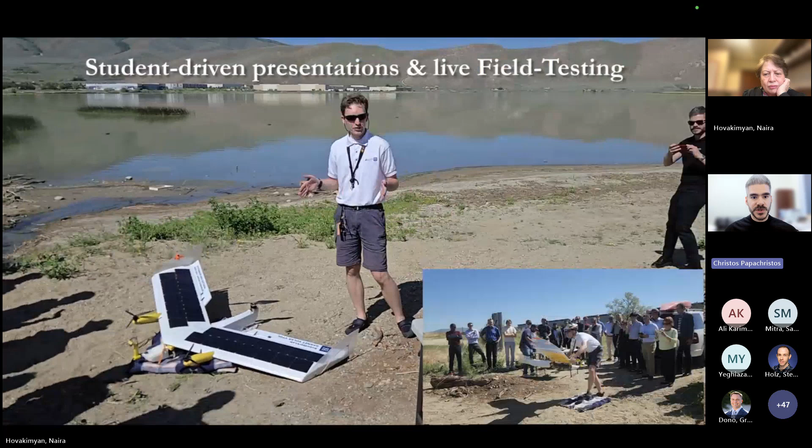Next slide, please. For last, I'd like to highlight that our project organized and hosted an open to the public field demonstration event held here at UNR, which was named the NASA ULI Autonomy Fest. This gave the opportunity to students across all institutions that came to Reno for these days to actively present the products of their corresponding research, not just as presentation slides, but as real-world integrated algorithms and systems working in the field, live, in front of an audience that was formed by both academic and research lab faculty and leaders, but also by industry partners coming from Lockheed Martin, Boeing Aviation, Google Wing, and the Sierra Nevada Corporation.

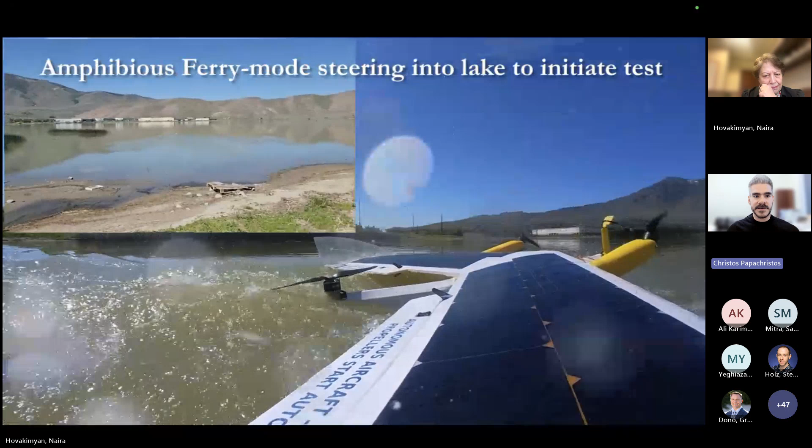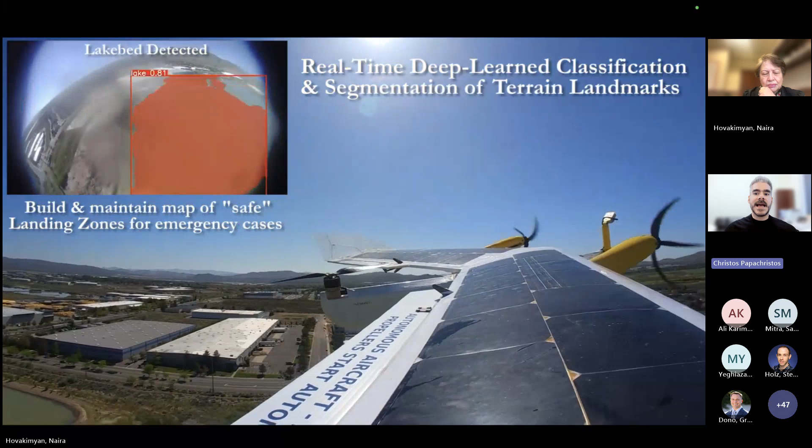So for the first part of the video here, you can see the execution of the emergency water-based landing live in front of a public crowd, as previously explained. I'd like to mention that this type of autonomous emergency handling situation, by performing opportunistic landing at a local region of the environment based on local information alone and the understanding of mission and aircraft limitations, such as flying too low to reach any non-local infrastructure, is pretty much the same paradigm that we were inspired by in our original proposal for this project, i.e. building virtual Captain Sully level capabilities into the urban air mobility vehicles of tomorrow, of course, referring to the very well-known and historical decision to emergency land a passenger aircraft on a nearby river, leading to the life-saving so-called Miracle on the Hudson.

For the second part of the video, coming up right now, you will see the live demonstration again of replanned trajectories computed to provide obstacle avoidance with guarantees based on covariance steering. Let's give it a second.

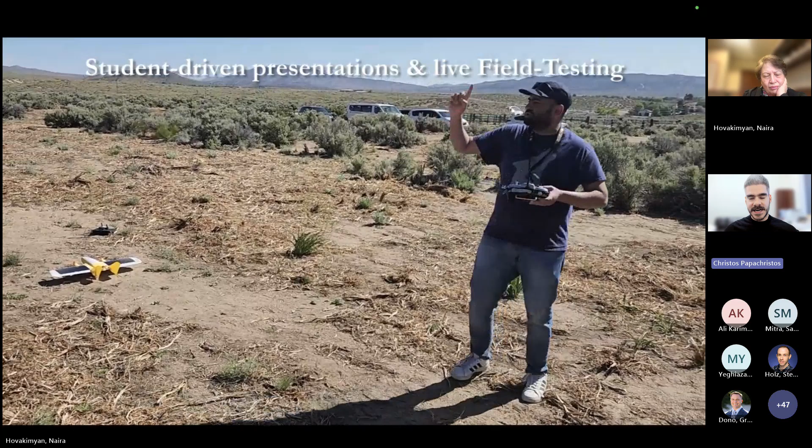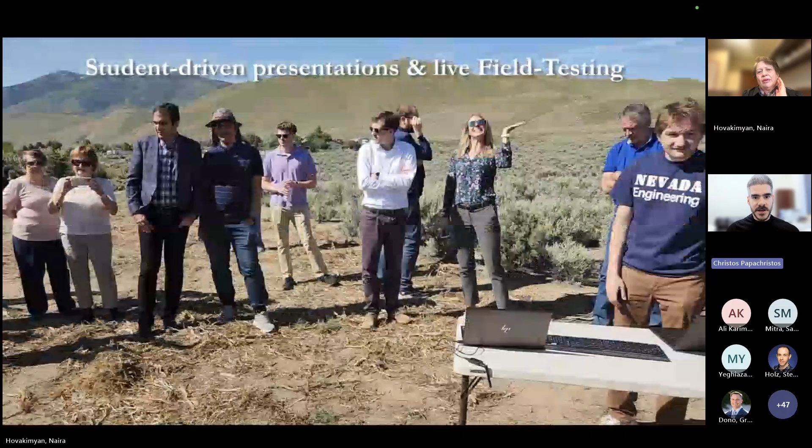As mentioned, this is again a live demonstration led by students in front of a crowd consisting of industry leaders, but also academic partners. And the platform supporting the execution of this framework is the Minihawk platform. You will note its small size, despite its advanced onboard computational capabilities. And you will note that it is a hybrid VTOL and fixed-wing flight envelope platform, although in this particular scenario, it's mainly flying in VTOL mode.

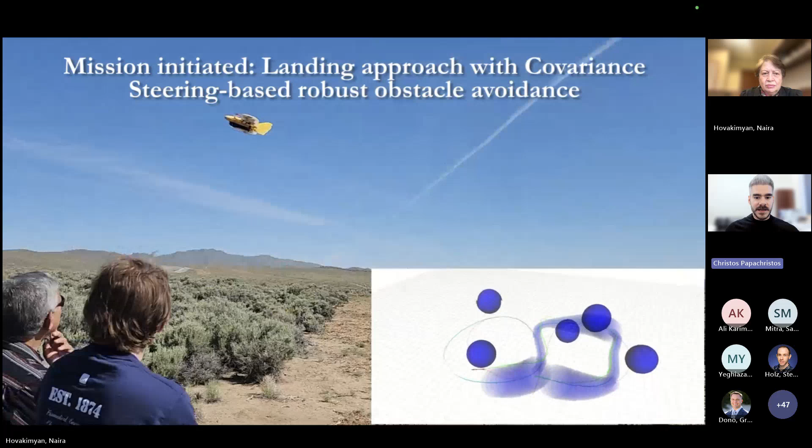I'd like to mention and highlight the fact that the students that are leading these experiments in the field are a mix that ranges from the PhD level all the way to undergraduate students. And here's the live execution of trajectory replanning in order to guarantee covariance steering-based safe maneuvering approaching a final landing destination.